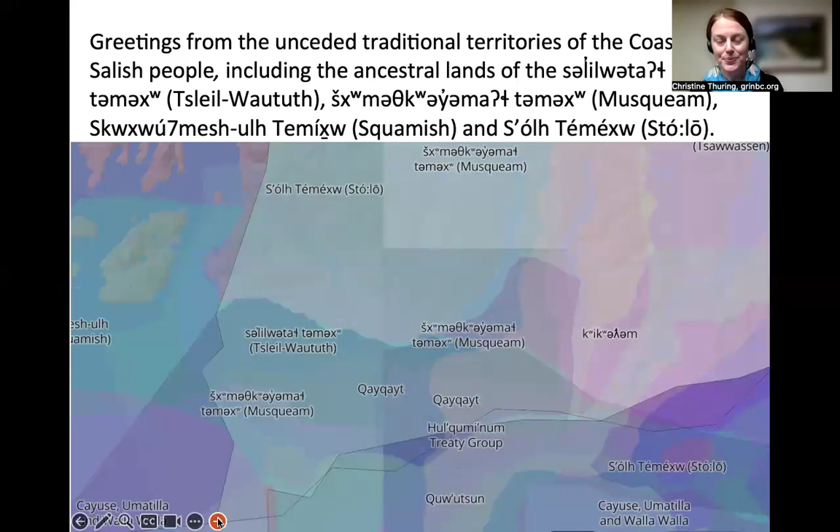So quick introduction to GRIN. Just so you know, we are quite a young nonprofit. We're an interdisciplinary network with the aim of building a network between anyone and everyone who's interested in healthy water, healthy people, healthy biosphere, with an emphasis on the built environment. So there's different things that we do. Our bread and butter, as it were, is green roof tours, followed by happy hour. It's a good model. So that qualifies as education and outreach and also networking.

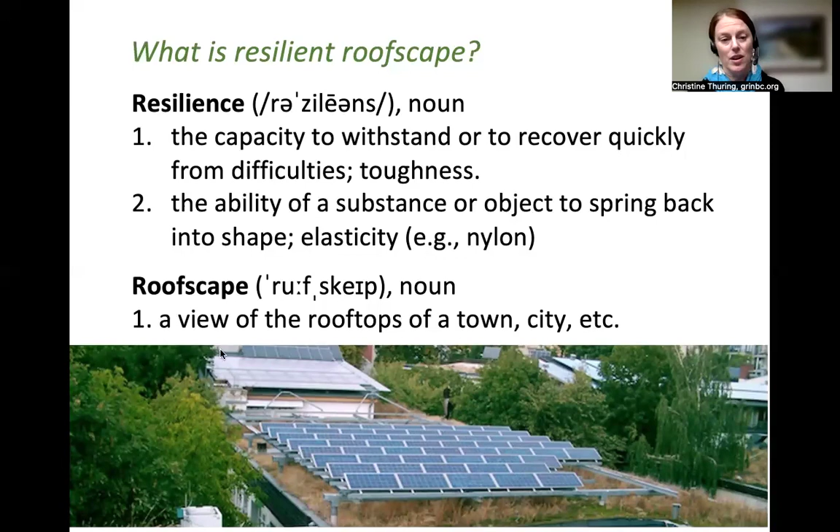And so perhaps to open up properly, it begs the question, well, why do we need resilient roofscapes? The reason is that roofs occupy a huge surface area. And of course, the buildings beneath them account for a lot of energy consumed in every town and city around the world. In short, the roofscape has impacts.

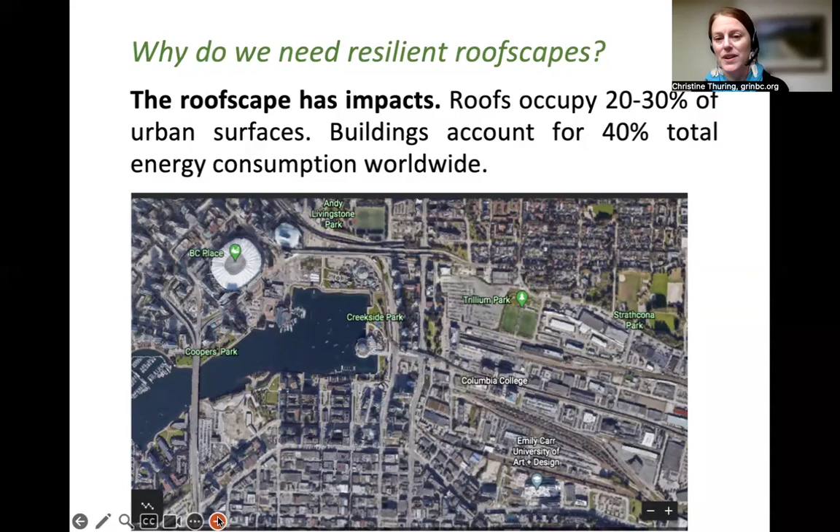This is just an aerial view of Vancouver. I'm sorry, the photos are a bit Vancouver centric, but I do have some images of green roofs in the Okanagan too. So we're talking about impacts. Look at all that hard surface. Much of it is roofs. And so let's look at what are those impacts.

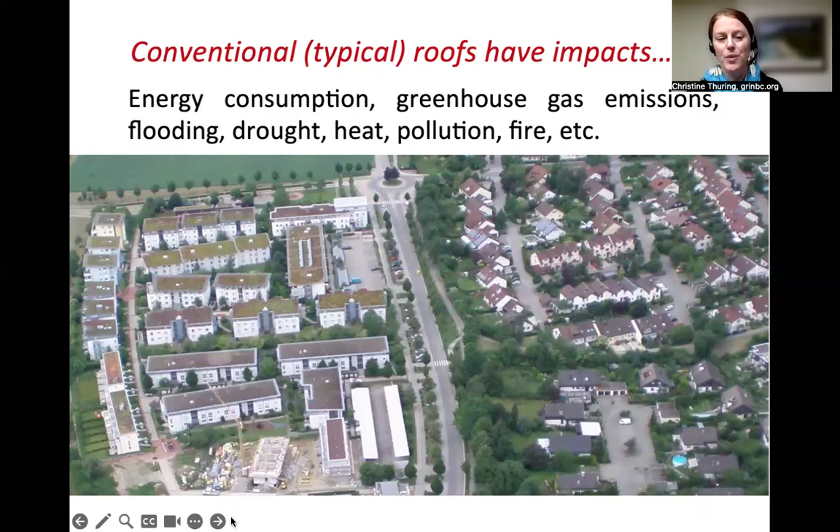Conventional roofs or typical roofs have impacts related to energy consumption and thereby greenhouse gas emissions, but then also flooding, drought, heat, pollution in lots of different areas, fire. And to be clear, we're talking about conventional roofs in the sense of typical roofs, the roofs that we most commonly see in our areas.

But basically, our population is growing. Of course, in the Okanagan, the population is growing very rapidly. And what that means, just by default, is more roofs and more associated infrastructure, which is generally hard infrastructure. And of course, that is matched by climate projections that are becoming more extreme, especially in the Okanagan. So that's an overview of the impacts.

So what is the actual issue? Can we break that down? So conventional or typical roofs basically have one function, right? It's just to provide waterproofing for that building. So the issue is that they break down when they're exposed to the sun and to the elements. And so within 20 to 30 years, they need to be replaced. Their breakdown leads to toxic byproducts because they are hydrocarbon based with lots of other things in them.

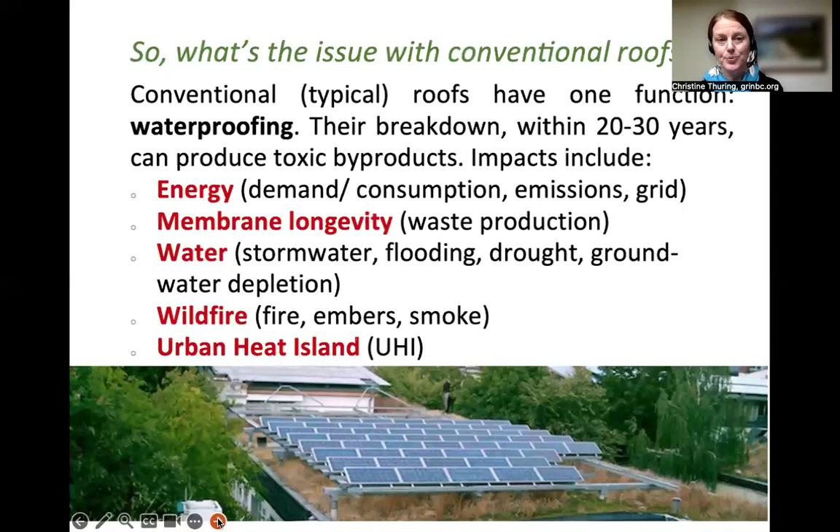And so these are some of the impacts that we're going to look at in a little bit of detail in the next section of slides. We're going to look at it through the lens of data that was collected on a green roof research facility in Vancouver. So while the data will be coastal BC, in general, the results are similar to results from most parts of the world, and so they will be relevant to a certain degree in the Okanagan. Obviously, the ideal would be we actually had data in the Okanagan, which we don't at this time.

As you can see, though, this research roof had two green roofs. One was really shallow, just 3 inches. One was quite deep at 6 inches. And in the center was a reference roof, which is a conventional roof, a very popular roofing assembly that is quite dominantly used in BC. It's a 2-ply SBS system for those roofers out there.

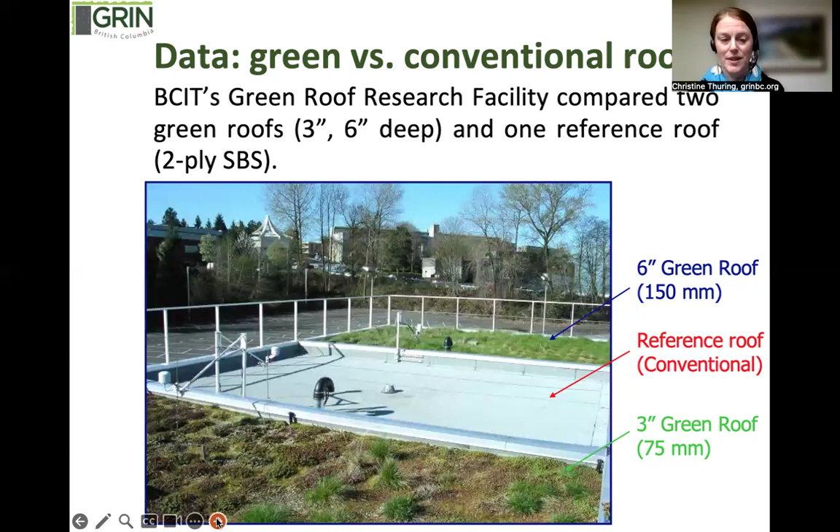So let's look at those impacts through the data. And I'm just going to breeze through here, so don't get overwhelmed. I'm hoping to, again, keep that bird's eye view to a certain degree. So this graph shows the 4 seasons: winter, spring, summer, and fall. And on the y-axis, going up the side, is the heat flow. So that's basically heat entering and leaving the roof.

So the red is the conventional roof, and the green and the blue bars are the two different green roofs, the 3-inch and the 6-inch. And as you can see in every season, the conventional roof is either losing or gaining a lot of heat, regardless of the season.

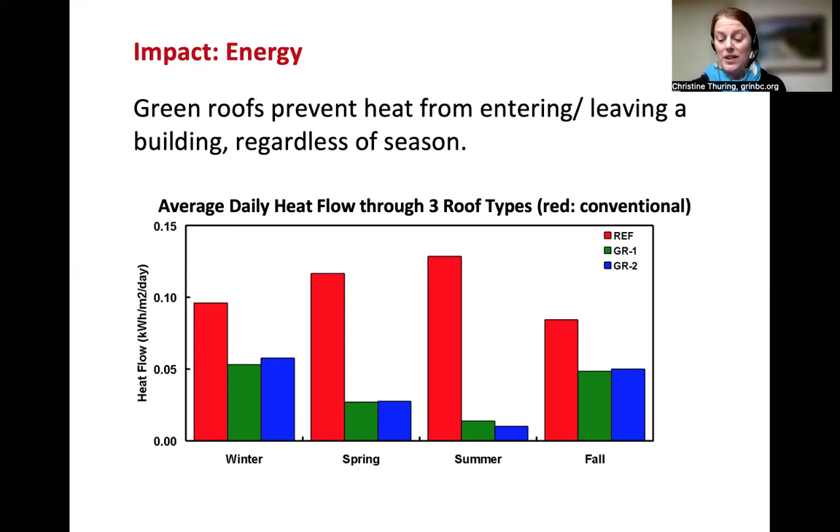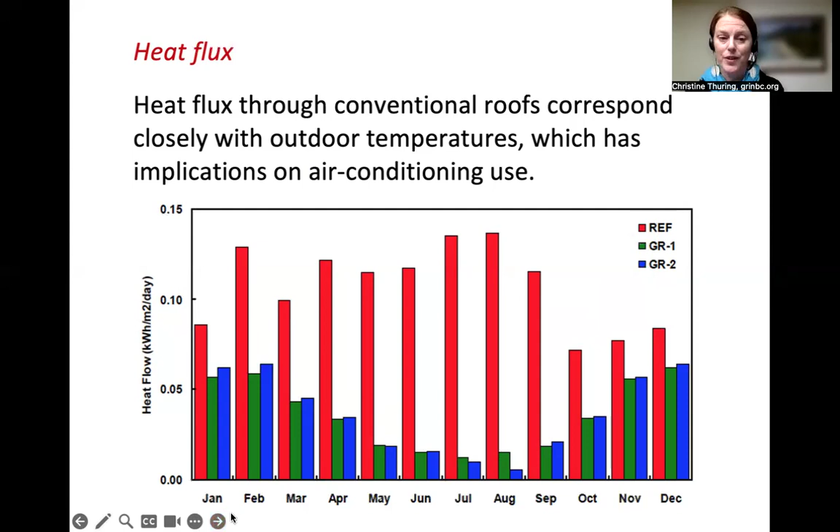So this heat flux, as we can see on this monthly graph, so every month of the year is shown here with that same heat flux going up the y-axis. The red bar, that's the conventional roof. And you can see, and you can also imagine, in the summertime when it gets a lot warmer, there's a lot more heat flux. But even in the winter months, there's still a lot of heat. So in that case, it's heat leaving the building. Of course, in the summer, that has implications on air conditioning and impacts on the grid for energy use to keep the building inside cool.

So another impact, I mentioned waste, pollution. So that relates again to the membrane being exposed. It's not protected. The conventional roof is not protected, whereas green roofs obviously protect the membrane. They're on top of the membrane. So I mentioned before that exposure to UV and to the elements, and things like hail and freezing and daily heat from the sun. That's what actually breaks down the waterproofing. So conventional roofs have an average lifespan. Sorry, I shouldn't say 10 to 15 years. It's more like 15 to 30 years.

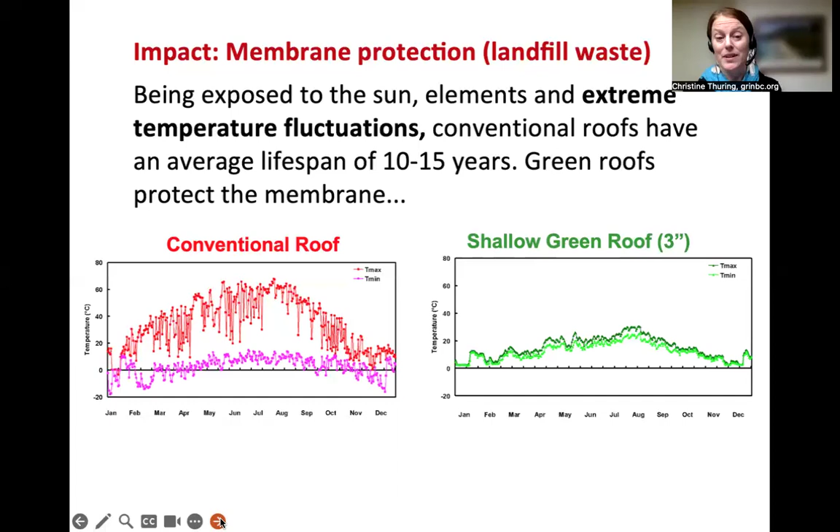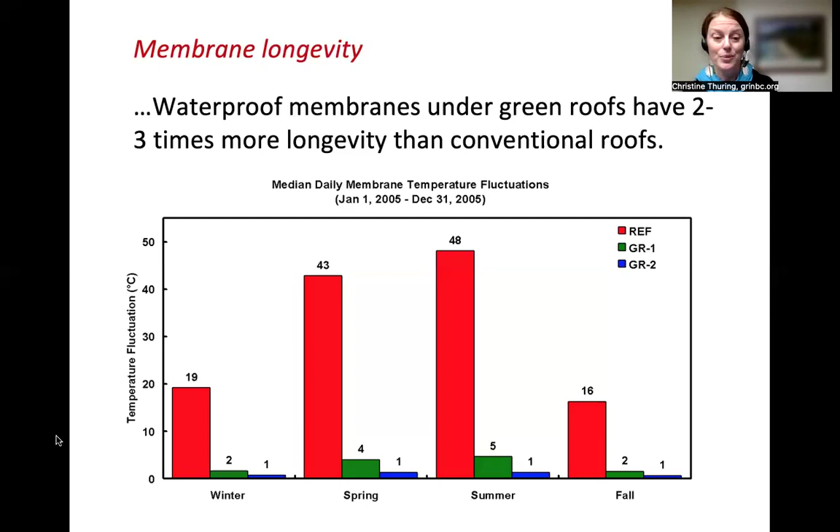And as a result, we've got this estimate that waterproofing under the green roof have 3 times more lifespan than conventional roofs, which is worth a lot if you think about it. It's a lot less waste going into the landfill.

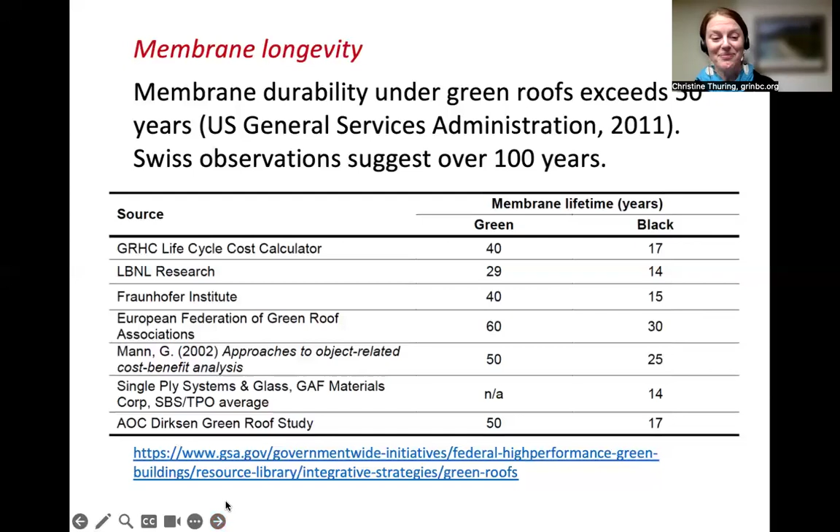And in Switzerland, where they've got some really old green roofs, and I should have said as well, I'm of Swiss heritage, so I spent a lot of time in Switzerland, and I know a lot of the green roofs there. There's this one green roof, it's over 100 years old, and that membrane is still intact. It's also home to many species of orchid that aren't found anywhere else in the country anymore. So yeah, green roofs are really great in those ways.

The impact of water is also a major issue with conventional roofs. So of course, because they're hard surfaces, when it rains, that water just immediately goes down the drain.

Yes, Lori, I'm seeing your gesticulations there.

It's true. Huge impacts on surface water quality. Salmon are, we know now the impacts of stormwater and of the 6PPD-quinone chemical that comes off of tires. So when we're flushing loads of stormwater into our stormwater drains, there's issues on surface water pollution, fish mortality, also combined sewer overflows, which then, of course, leads to gastrointestinal illnesses.

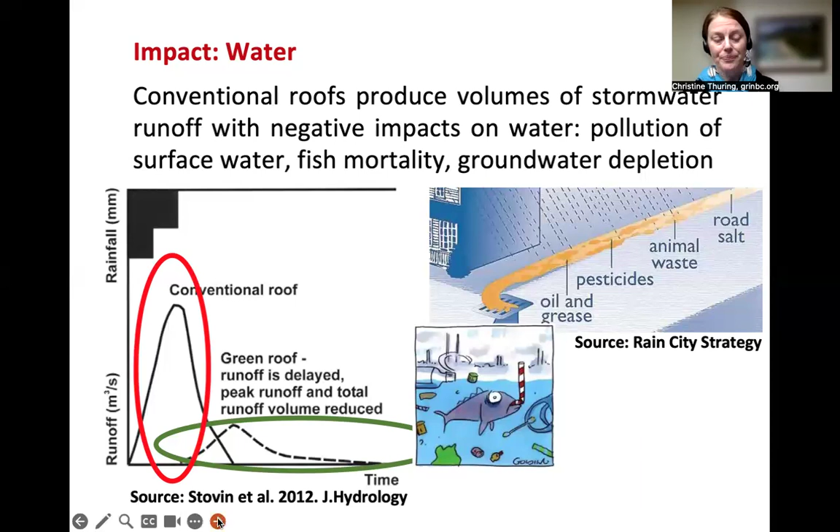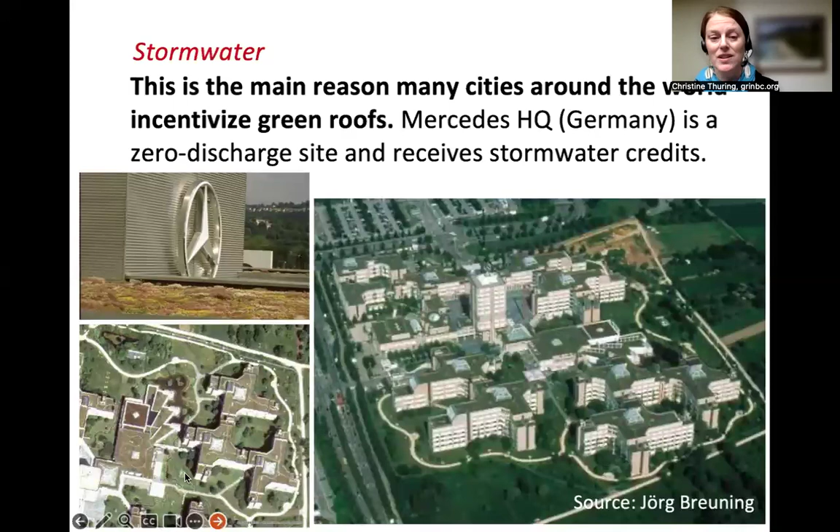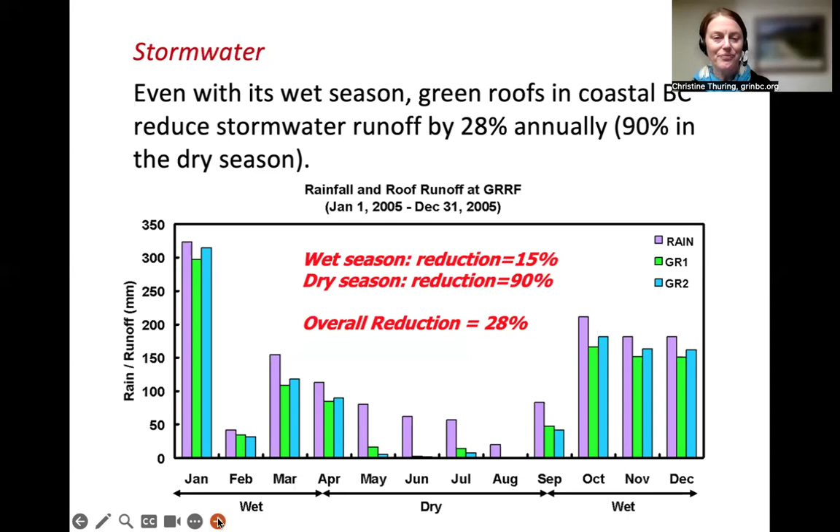And so if we take a sort of a mean between 90% reduction in the summer and 15% reduction in the winter, we get about 30% reduction in stormwater. So it's still worthwhile, still functioning.

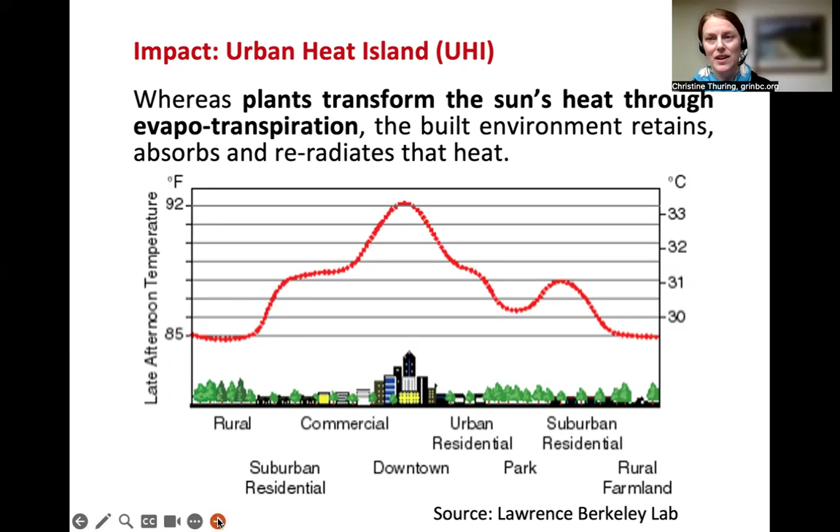So if we don't have any plants or soil or moisture in our cities, it just gets really, really hot. And of course, the heat in our region in general is increasing with what's happening with climate change. So this is actually a really important thing to consider.

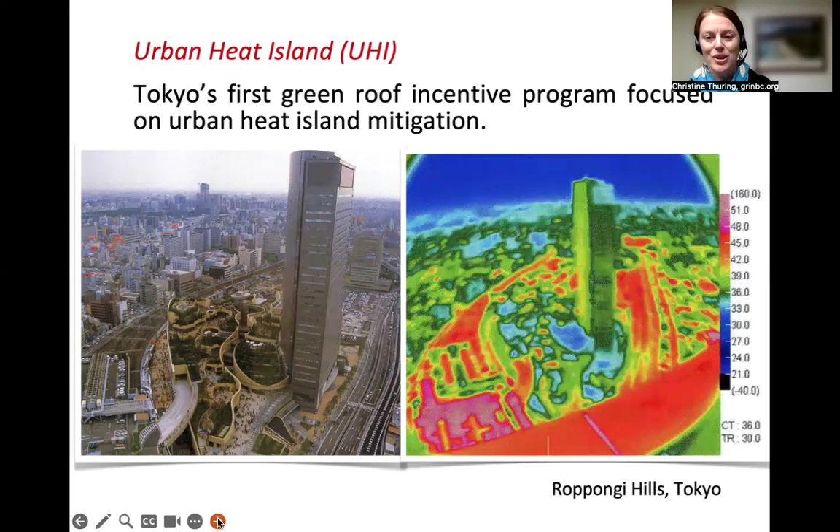It's called Roppongi Hills. Take a closer look at that, and you'll see this is actually a department store. It's a multi-layered department store with lots of trees and green roofs and just a massively vegetated complex, very biophilic.

Okay, and then of course, top of mind for many is the risk of wildfire. And a really interesting thing about green roofs is that they can actually suppress fire and extinguish embers. This goes contrary to what a lot of people think, but I'm going to show you why that is the case. And just to say that the fire rating for conventional roofs doesn't necessarily mean that they're going to stop a fire from spreading. I'm not going to get into that technicality because we're going to focus on green roofs.

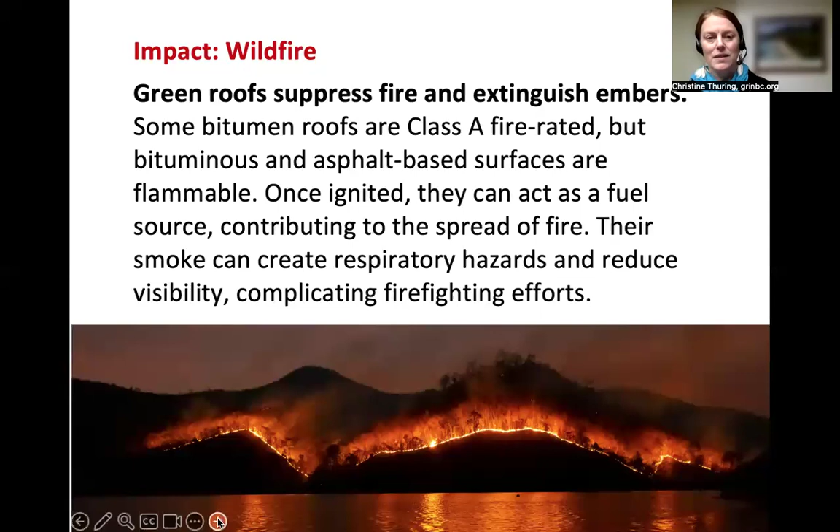So green roofs suppress fire. How does that work? This is some research that was done at the University of Montreal in partnership with Soprema, a waterproofing and green roof company. Basically, they validated a lot of other research out of Germany. There is a fire standard for green roofs; it's a very well defined function that green roofs can protect the roof, building, and the neighborhood from fire propagation.

So even if there is a fire, the composition and the depth of the growing medium will protect the building. The growing media tends to be largely mineral, which means a spark can land there, but it's not going to go anywhere. There's no fuel for it.

And then you'll notice the inset of the plant. That's a sedum, which is a succulent plant. You're probably familiar with them from xeriscaping gardens and also cliffs, and they're stress-tolerant plants, very fleshy. And as you can imagine, if an ember lands on them, they're just water, basically. I've actually heard someone say that sedums will pop when they get too hot, so they function as like mini sprinklers.

So needless to say, green roofs suppress fire and extinguish embers. And one last point about this as well. This is an image of a post-fire landscape with a wetland, and you can just see the effect of that hydrated land. The same principle applies to our cities.

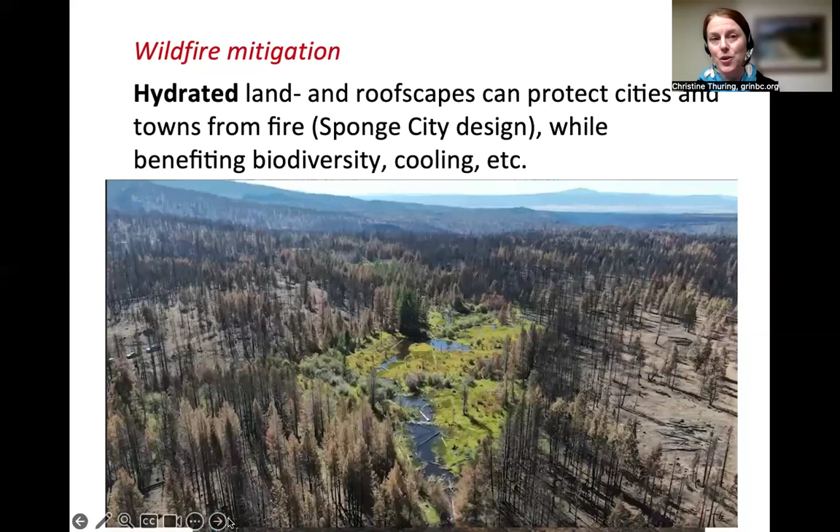There's actually a sponge city design concept, which is championed by a Chinese landscape architect, Kongjian Yu. It's really wonderful. Just Google sponge city design and it'll pull up beautiful images of what's possible when we basically restore our cities with plants and soil and water. And of course, there's benefits to biodiversity and cooling as well.

Okay, so that's sort of like how green roofs perform by contrast with conventional roofs. And so as you can see, if roofs cover 20 to 40% of the built environment, then that's really good real estate that we could use to improve the conditions of the built environment. So these five roof systems I'm going to present, they can be combined. And in some cases, I even emphasize the combinations. But these were identified specifically for the Okanagan.

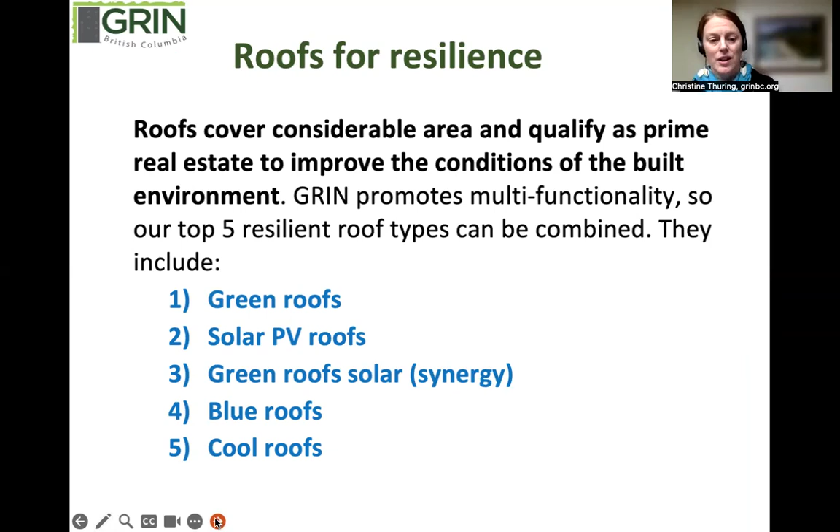So here's one of my green roofs in the Okanagan. This is built in Naramata. So green roofs are just one great system. They can be quite shallow. They can be very deep. The extensive green roof systems are the shallow ones. They require less irrigation than the roof gardens. But generally, to enhance establishment, it's good to provide irrigation. And of course, that's then a bonus for fire protection and that hydration.

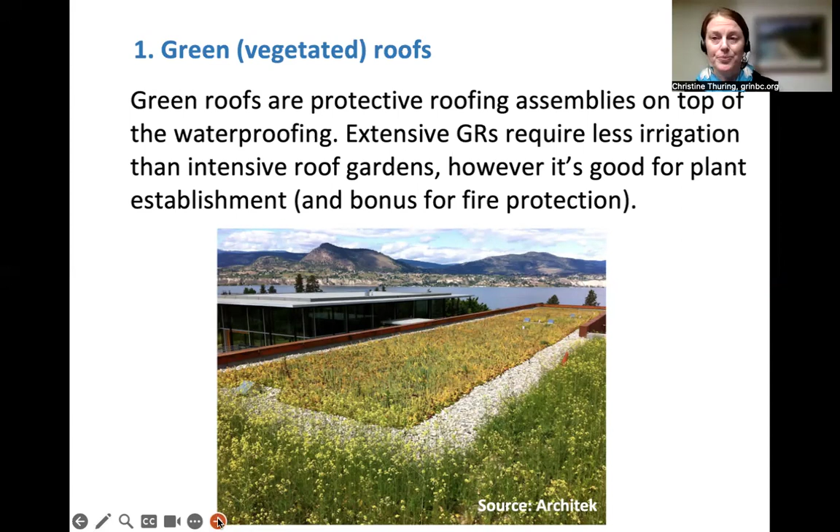So to the argument that it's too expensive, we could counter that with it's too expensive not to install green roofs. So in other regions, the return on investment for extensive green roofs could be 5 to 6 years. For intensive roof gardens, it could be 1 year. And that's of course because of the value, the real estate value. Again, we don't have numbers for the Okanagan.

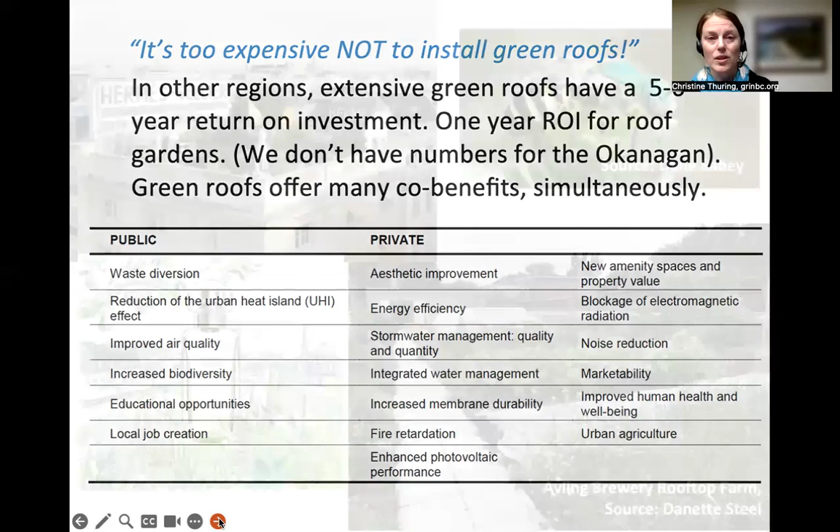This table below just kind of gives a flavor of some of the many co-benefits that green roofs provide all at the same time. So public and private benefits. And that multifunctional simultaneous delivery of these benefits is what makes them so powerful, so potent. So you can see they're beautiful spaces. They're great for biodiversity, urban agriculture. So many different ways that we could use the roofscape.

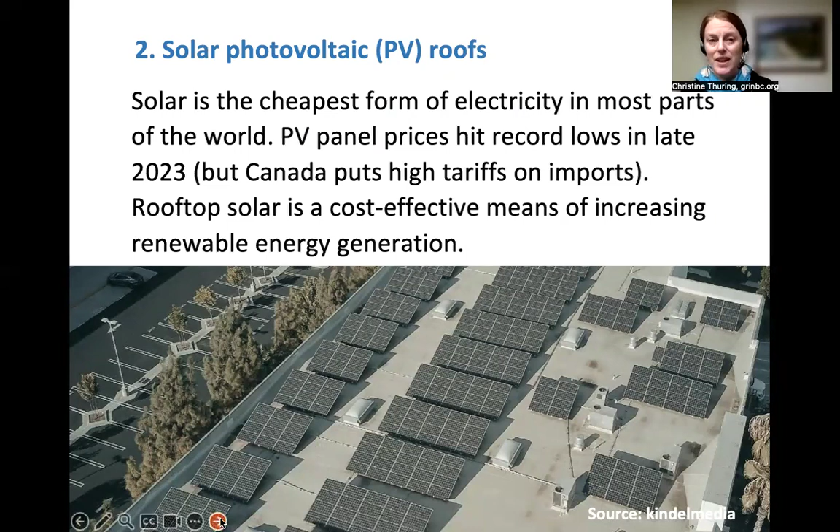The next obvious roofing technology is solar PV roofs, and it sounds like you recently hosted a talk about that as well on a deep dive. So, of course, solar is a great form of electricity. The prices are really going down. I guess prices here aren't as low as they are in other parts of the world because of the tariffs that Canada places on imports. But yeah, it's a really great means of increasing renewable energy generation on site, decentralized.

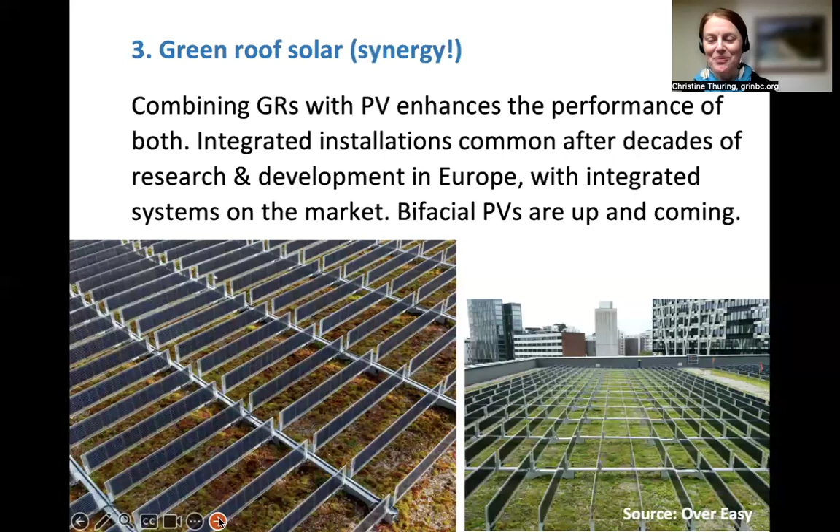So green roof solar, there's actually been a lot of research recently just looking at which roofing type, roof assembly is most efficient for solar power generation. And across all the studies I've looked at, whether it's comparing PV panels located on top of black, gravel, cool roofs, or green roofs, green roofs always generate the most electricity for photovoltaics.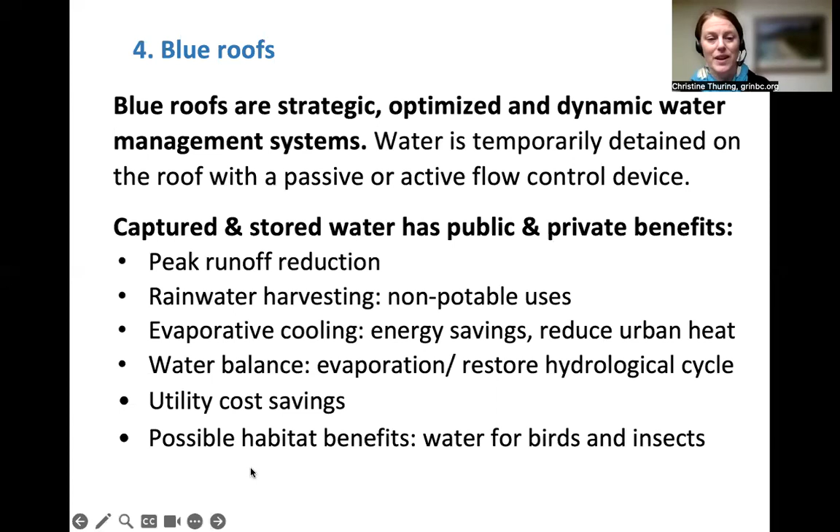So this kind of gives you a rough idea of one example of a blue roof. It's a highly adaptable design. Like I said, water can be open to the sky, or it can be concealed under the amenity space of a roof garden. And it's worth noting that these are actually an alternative to below ground detention tanks. So many buildings might be specified with below ground detention tanks to manage their stormwater.

But of course, that's going to take up several parking spaces. And it does nothing for cooling, and it's highly engineered and requires a lot of maintenance and care. Not to say these don't require maintenance and care as well, but again, the co-benefits are so much greater here.

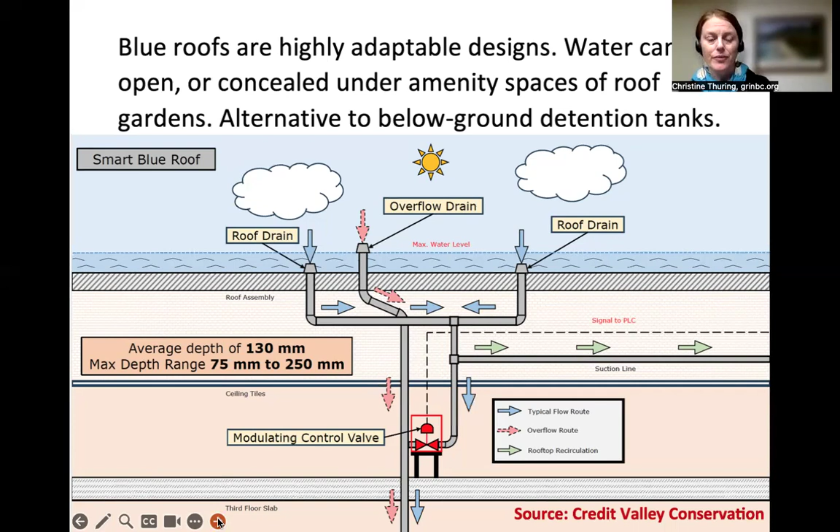And then the last resilient roofing technology is cool roofs. So they're called cool roofs. They're basically white roofs, whether they're painted or actually white in material. And the idea is that they radiate or reflect thermal heat away from the building into space. Unfortunately, if you're a neighboring building and that light reflects into your building, then you will capture that heat. So it's not very neighborly.

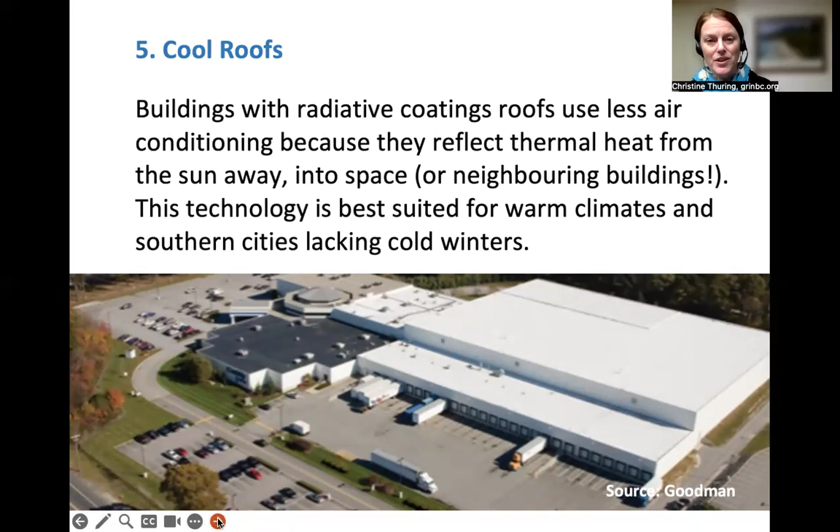This technology is best suited for warm climates and southern cities that lack cold winters. So perhaps not the most appropriate for our climate, where it does get quite cold. And yeah, in terms of what the science says about cool roofs, there was an analysis that suggested that cool roofs will actually cost a lot more money due to the heating penalty, and that's what happens in the winter when that roof just loses loads of heat.

Other studies that have compared different roofing technologies have generally ranked cool roofs the lowest because, of course, their only benefit is that cooling benefit. They don't do anything for stormwater or biodiversity. And maintenance-wise, of course, they have to be kept very white. So they also require attention and maintenance.

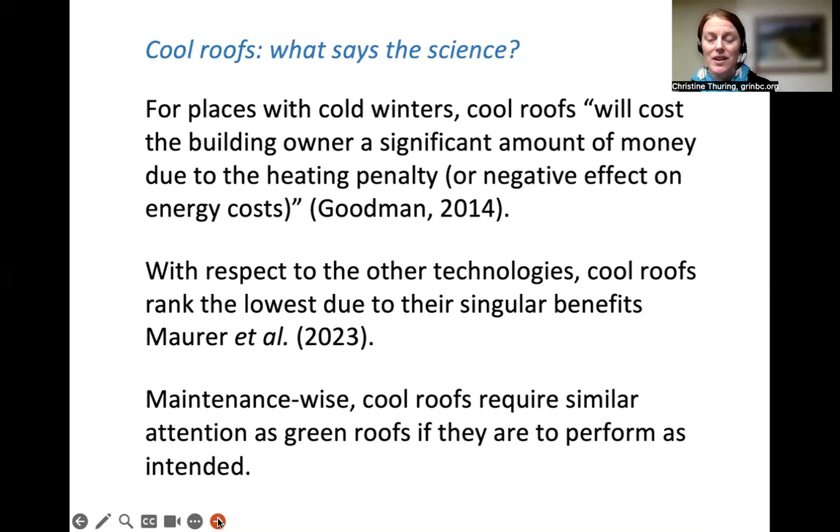So you might think, great, well, what's holding us back then? Why aren't they everywhere? So the fact is that because there is a greater upfront cost, political will and leadership are essential. There are still barriers in place. And so, new developments or projects would really benefit from guidance or recommendations or practice guides. And on top of that, the market and the industry actually require investment and support.

There are many policy levers and programs that are really useful to incentivizing or promoting these kinds of technologies. I won't go through them in any detail, but just to give you a flavor, there are some towns and cities in Canada that have incentive or policy programs. The city of Toronto is probably one of the best actually in North America, at least right now. It's got a green roof bylaw and an eco roof incentive. So that city is really having a burgeoning green roof industry, lots of green jobs, lots of green roofs.

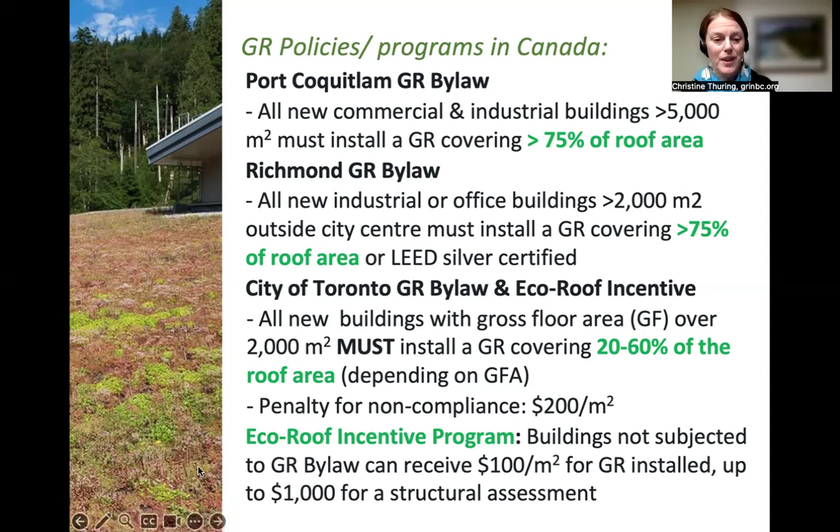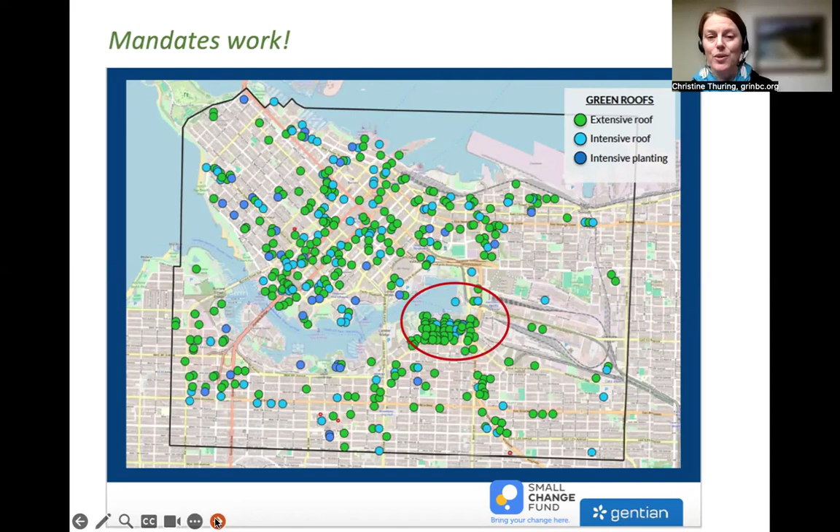And this is just a visual of downtown Vancouver that shows that mandates work. So in that red circle there, you can see that massive cluster of green roofs. Those are all the green dots. That is the Olympic Village. So that is a LEED Platinum community. Every building has a green roof, and so it's mandated to have a green roof. And you can just see, well, mandates really work.

And then, of course, investment and support for market and industry would certainly help to move it forward, especially if we are preparing for zero carbon 2050 or really want to embody the UN SDGs. And of course, green jobs need training. These are professional jobs.

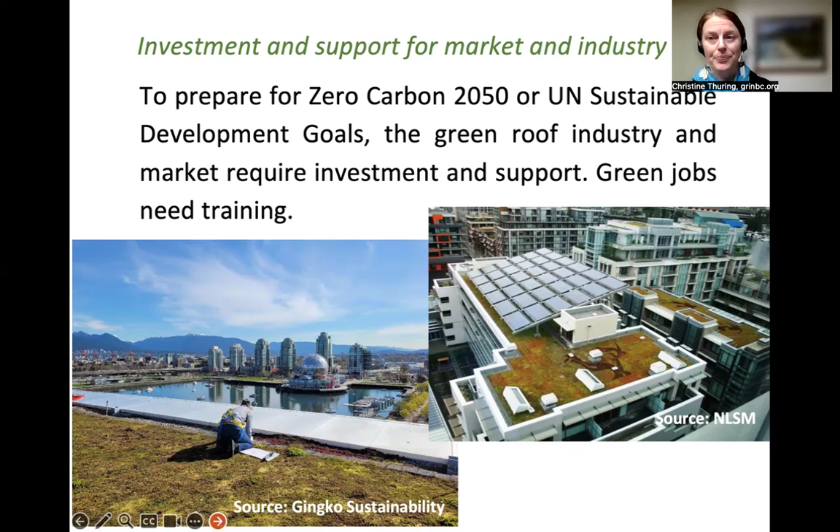So it could be that maybe the world is fine and we don't need a better world, but why would we not want energy independence and healthy habitats and sustainability, green jobs, clean water and air, etc. So maybe it's just the right thing to do. There aren't really any negative consequences from investing in green roof policies and mandates and installations.